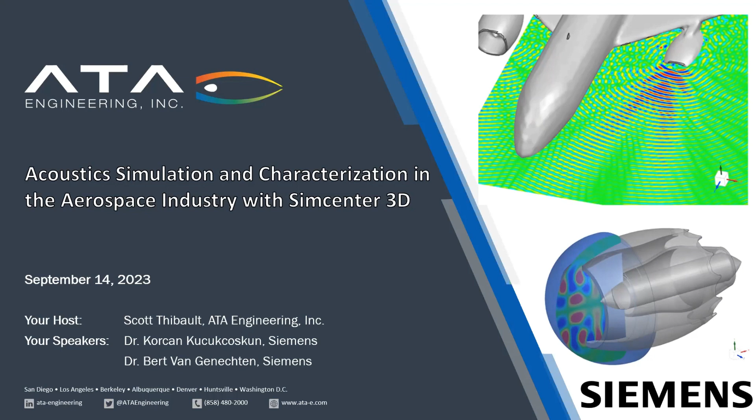ATA Engineering is an employee-owned small business with a full-time staff of almost 200. Our headquarters is located in San Diego, California. We have a very experienced staff of engineers who have worked on a wide variety of projects for government and industry.

Our specialty is providing high-value engineering services to help solve our customers' toughest product design challenges. Our principal industries that we serve are aerospace, space and aerospace - aircraft, launch vehicles, satellites, liquid rocket propulsion, etc.

Also robotics and controls. We have a very interesting practice in themed entertainment - think roller coasters, animatronic figures, that sort of thing. We work in the defense field and are a classified U.S. government defense contractor. We also work in industrial and mining equipment, consumer products, and other fields, wherever our customers need high-value engineering services.

We provide these services from our offices nationwide, starting with our headquarters in San Diego, but with branch offices in Los Angeles, the San Francisco Bay Area, Denver, Albuquerque, Huntsville, Alabama, and Herndon, Virginia. And coming soon, our Northeast Regional Office in Boston, and a new office that we are going to be starting up in Madison, Wisconsin.

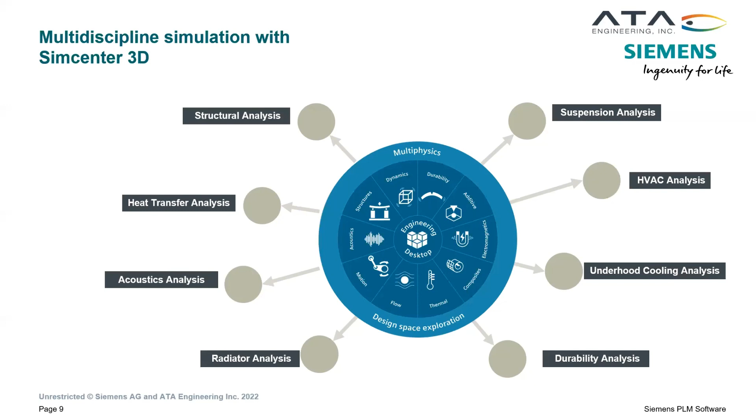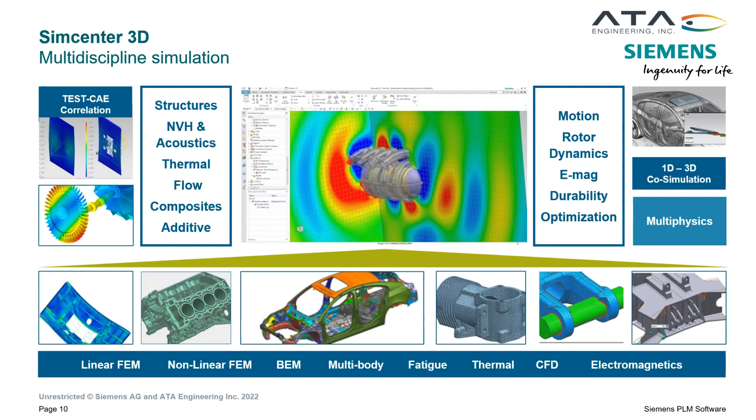Here are all the things that Simcenter 3D can do: structures, noise, vibration, and acoustics, thermal, flow, composites, additive manufacturing, motion and kinematics, rotor dynamics, both high frequency and low frequency electromagnetics, durability, factor of safety, and optimization, all within one product family. Today, of course, we're going to be talking about NVH and acoustics with a focus on acoustics for the space and aerospace industries.

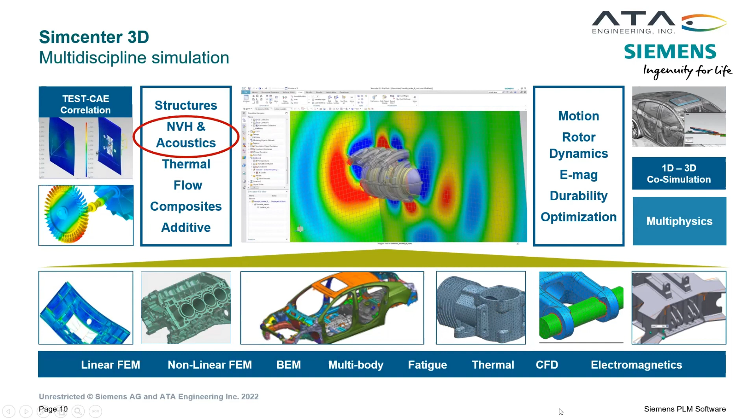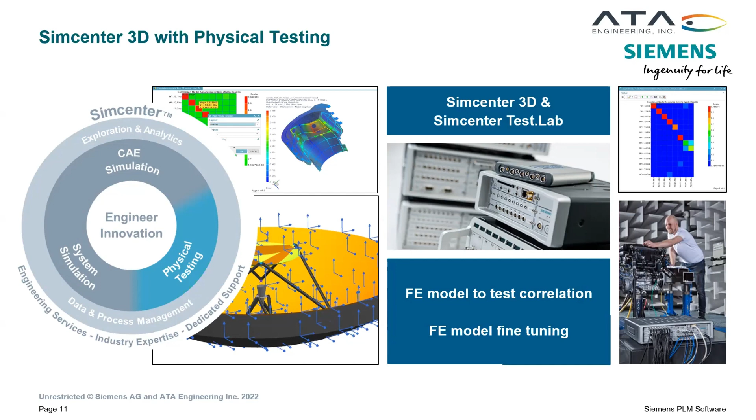Before we move into the presentation itself, I also would like to point out that today's presentation includes references to acoustic testing and test data, as well as to acoustic simulation. ATA Engineering is the exclusive Siemens channel partner for Siemens test and measurement solutions. These include Simcenter Test Lab software and the SCADAS hardware. This is a complete solution for physical testing, not just for acoustics, but for many other areas.

Acoustics is at the top of our list here, but you can also use Test Lab and SCADAS hardware for durability testing, environmental testing, TPA. We have a webinar coming up on transfer path analysis just next week. Also model-based systems testing, rotating machinery testing, structural dynamics testing, and modal analysis for FEA model correlation.

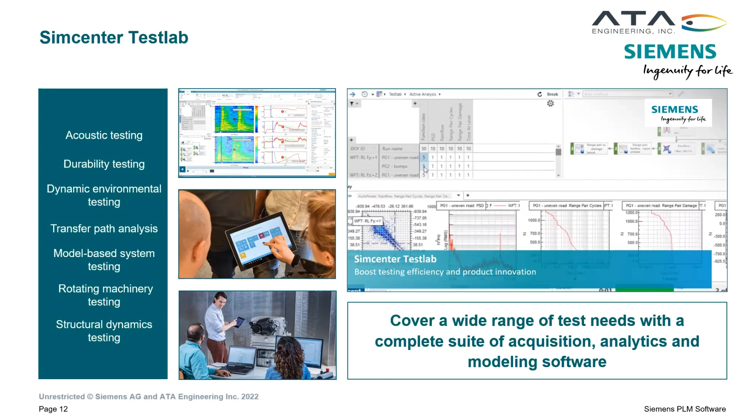On the hardware side, the SCADAS line includes data acquisition systems from handheld units, not much larger than an iPad, to giant laboratory scale units designed to be permanently installed in wind tunnels and other major test facilities. If you have any interest at all in the testing hardware and software, please feel free to let us know.

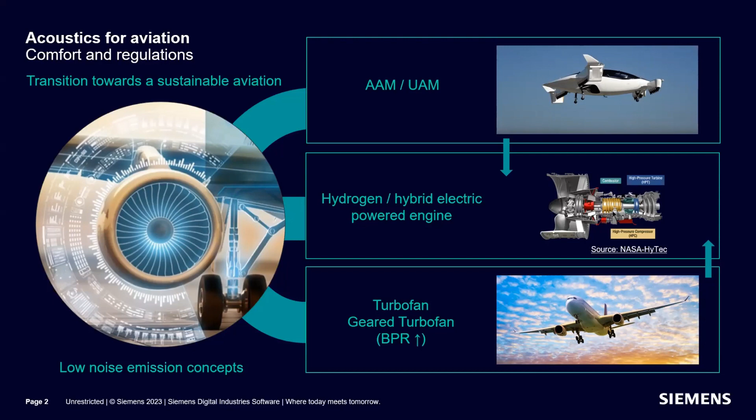That's for acoustics in aviation, as I mentioned, for comfort and regulations. But for space, it's not necessarily driven by comfort and regulation. That's more important for launch survivability, especially for payloads such as antennas, solar panels, and structural panels. They need to survive the existing external loads, which can come from turbulent boundary layers or existing shock waves, and also gas exhaust from the engine during launch. So it's another acoustics problem, but from a different perspective.

At the end, especially for the second half, my colleague Bert will explain more about the acoustics environment.

Today we have a slide set for three case studies. We will start with the lower applications, the drones, representative of urban air mobility problems. Then we'll continue with aero engine intake noise and validation. Finally, we'll go to the launcher for lift-off noise and diffuse field acoustic analysis. All three pillars are based on recent publications. If you are interested, please reach out so we can provide more information and link you to other experts.

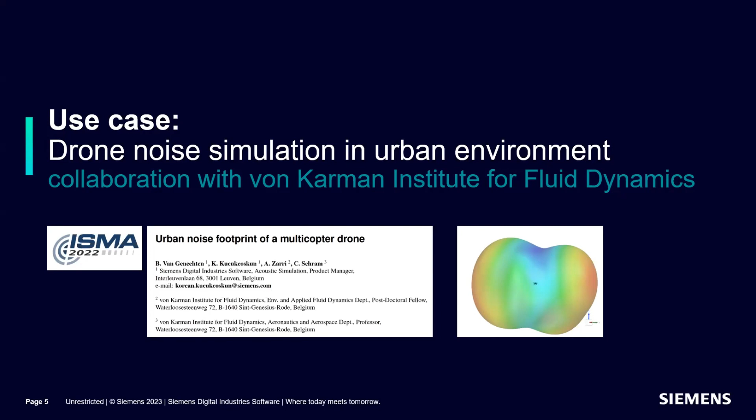Let's start with the drone application. This is a problem we worked on with the von Karman Institute for Fluid Dynamics in Belgium, published at the ISMA conference in Belgium last year. The work is based on the urban noise footprint of a multicopter drone, and we are looking at the acoustic field radiated by a drone towards observers located in urban environments.

What's the motivation for that? We are looking at an aeroacoustics problem for a drone roughly 60 centimeters in diameter, but the exterior reflective surfaces like ground and buildings are a couple of orders of magnitude larger. So if you want to solve the problem for a drone radiating towards an observer in front of a building, you may want to split the problem into smaller chunks and approach it in a way that an end-to-end solution is achievable.

This can even later be used in optimization cycles. So we are going to show how an acoustic field in an anechoic room can be validated with free field assumptions for microphones nearby, but also how the acoustic field around a building will be computed for observers close to the building. The goal is that we don't want to solve the flow problem again, and we want to make sure that when we solve the radiating problem, we are not re-resolving the flow for a building reflection.

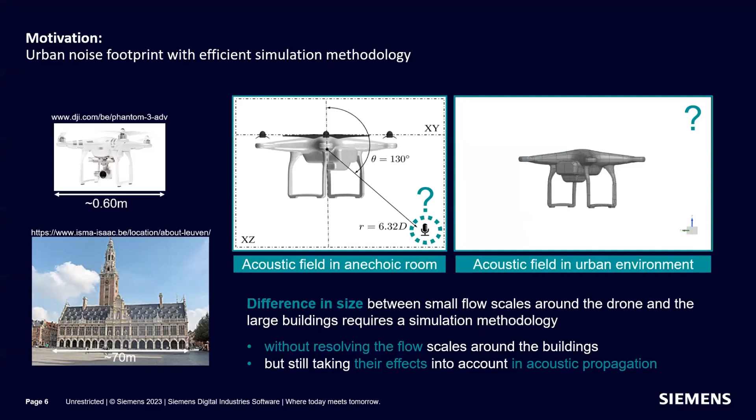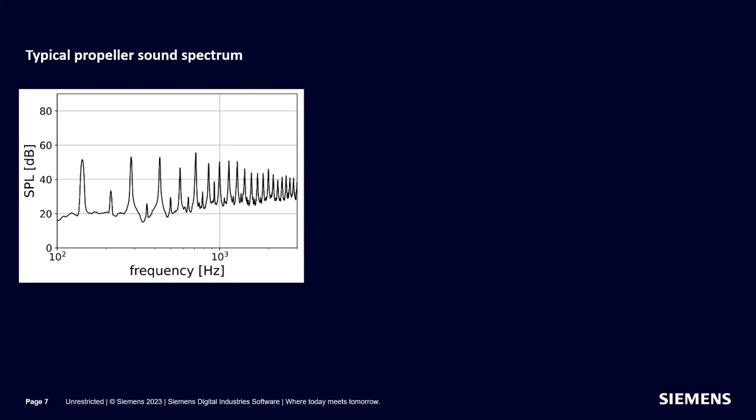For those familiar with the aeroacoustic signature of a drone, you will see tonal and broadband components. This is a representative sound pressure level curve in frequency. You see the peaks, or tones, for the blade passage frequency and higher harmonics. They come based on the relationship between the number of blades and the rotation speed.

Due to the perception of the human ear, this tonal content is the most annoying. So when tackling this problem, if you know the tonal part is important and broadband can be negligible for that particular application, we can look for a solution which solves only the tonal part. Of course, we have other applications where the broadband part is more dominant, and there we can apply another formulation. But for this drone application, and other urban air mobility problems where tonal content is important, we can look for the formulation presented in this paper.

For those familiar with the dominant noise source mechanisms for propellers, you will see steady loading or thickness noise. But we know that from propeller applications, also in the vicinity of an airframe, steady loading might not be the most dominant one, but it may be important for isolated propeller applications in free field.

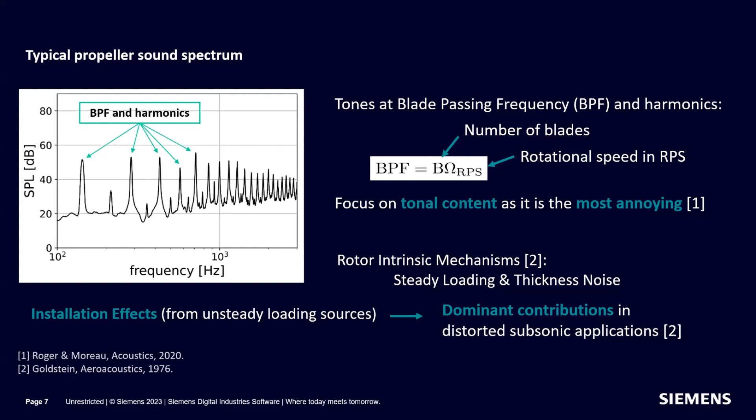Also concerning the shape of the propellers, maybe thickness noise is not important for this application. Therefore, thanks to the installation effect of the airframe on the noise source generation, the unsteady loading sources will be the dominant one. This is also the showcase for this application, so we know the loading noise will be the dominant contribution for subsonic applications.

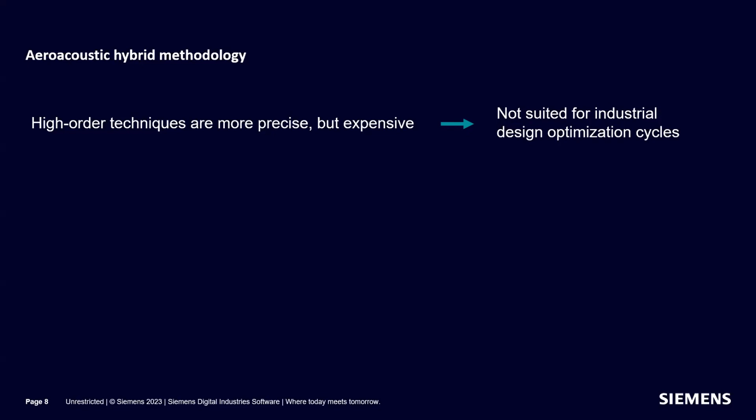You can approach this problem with different simulation techniques. You can do high order techniques too, but they will be more expensive just for the tonal fan noise problem in this urban air mobility application. Therefore, they may not be suitable for industrial design optimization cycles. Of course, they will give accurate results, but at higher cost. So what we are looking for is reducing the cost for the end-to-end problem, a trade-off between accuracy and computational cost.

Since we know which frequencies we are looking for, and we are not interested in the broadband component, we can solve the problem with what we call unsteady RANS simulation. This gives us the unsteady aerodynamic forces on the blade. This will be exported from the flow solution, and then we use a FEM-based acoustic solution to compute the near-field acoustic application and propagate it to get the observer levels.

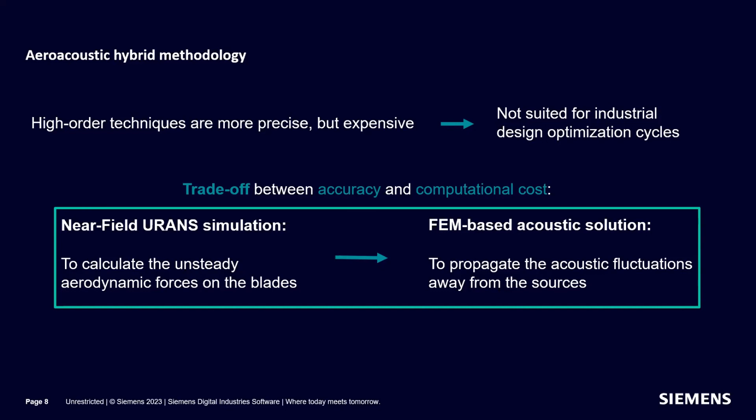So the application is a quadcopter. Two of the propellers rotate clockwise, the other two rotate counterclockwise, and this is a representative of the flow domain.

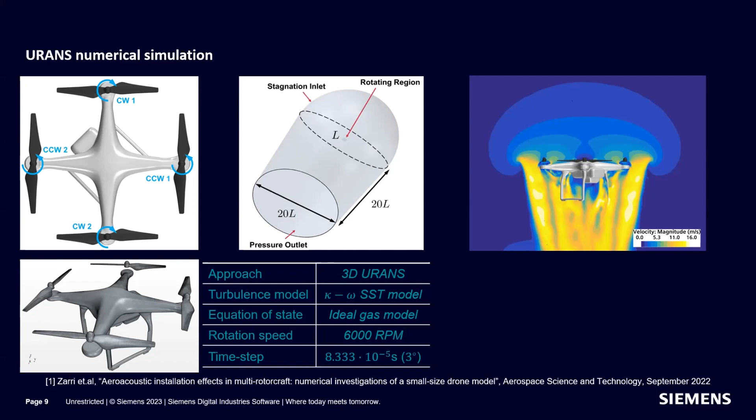I will not go too much into details for the computational cost and modeling, you can find information in the paper for the application. But what I can tell you is this is a k-omega SST model, 3D solution, not 2D or cyclic symmetry. We are looking at an ideal gas model with a 6,000 RPM propeller. All propellers rotate at the same RPM in different directions. The time step chosen was 8.3 times 10 to the power of -5 seconds, corresponding to 3 degrees of rotation.

Once the simulation is performed in Simcenter STAR-CCM+, the authors validated this with 1.4% accuracy against experimental thrust. This is very important for any aeroacoustics problem because we need to first make sure that aerodynamics is well captured such that we can use those aerodynamic fields to create a noise source. You can find more information in a recent paper in the Journal of Aerospace Science and Technology published last year covering this exercise.

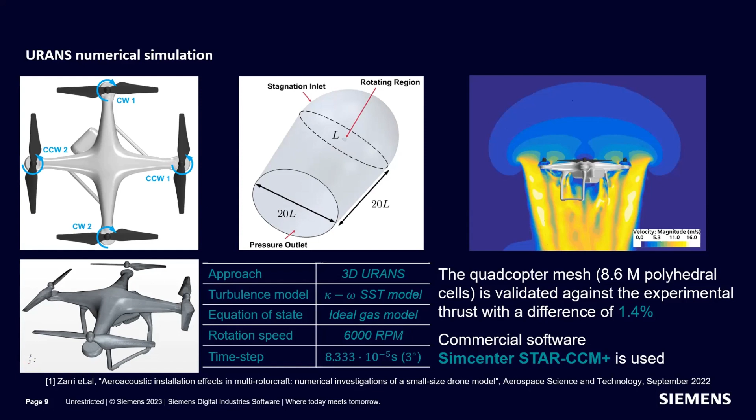Our users at von Karman Institute also did an exercise to see how much the airframe affects the aerodynamic source generation, and also how much the airframe affects propagation. So you will see some interesting outcomes also in this publication.

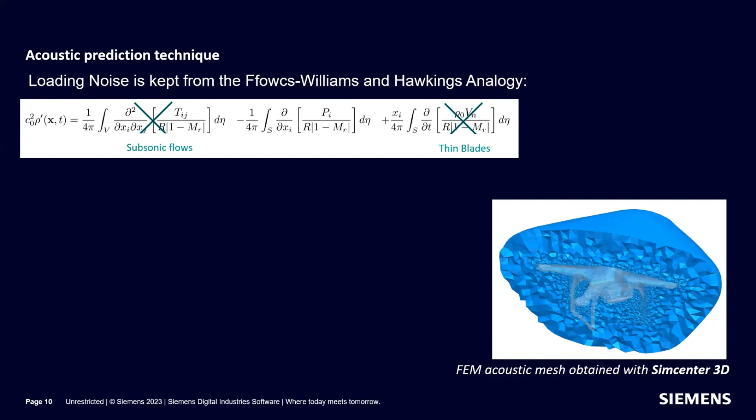I will not show too many formulas here in the presentation, but in a nutshell, we are using a typical Ffowcs Williams-Hawkings analogy. Since we know this is a subsonic and thin blade application, some of the terms can be neglected - we are not saying they are not there, just that they could be negligible. So we can drop this to a simple loading noise application, and by exporting only the surface pressure on the blades, we can create an equivalent noise source in Simcenter 3D.

This can also use the airframe as a scattering surface, which will give you directivity changes in the immediate neighborhood of the quadcopter.

You can see a sketch of a cut plane of the mesh used in Simcenter 3D. It's a convex mesh, and the convex boundary has two properties: it doesn't let acoustic waves generated by the source back into the finite element domain, but it also lets acoustic waves propagate freely to the far field observer. So you don't need to mesh all the acoustic field all the way towards an observer—observers can be outside of the FEM domain.

What I'd like to highlight is that for those familiar with FEM, this may not be the best mesh because there's not a uniform mesh distribution—some parts are fine, some are coarse. This is because we are using a finite element adaptive order methodology, based on refinement of the acoustic mesh and high order shape functions.

Just to give an example for those familiar with the finite element concept: you need to mesh your problem with, let's say, a rule of thumb of 6 elements per wavelength. So if you're solving a multi-frequency problem, like multi-blade passage frequency, you need to create a finite element mesh accurate for your highest frequency. Then you solve different frequencies using the same mesh, and suddenly you're using a very fine mesh for a very low frequency. Here's a basic sketch representative of a coarse mesh—you see it gradually gets bigger and bigger.

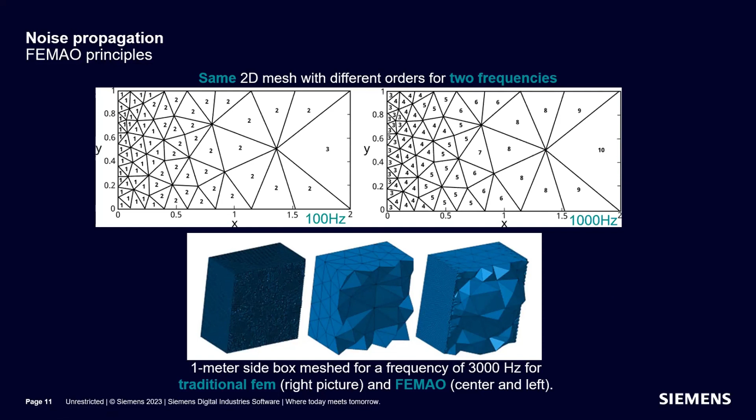We use finite element adaptive order for the near field, and the validation can be found in the paper—for the first 4 blade passage frequencies, we got very good agreement between measurements performed in an anechoic room and the finite element model used in Simcenter 3D. The delta dB is around 3.5 dB, which is acceptable for the first 4 BPF. This validates free field anechoic room performance.

But let's go to the next step: putting the drone in a hovering position in front of a building.

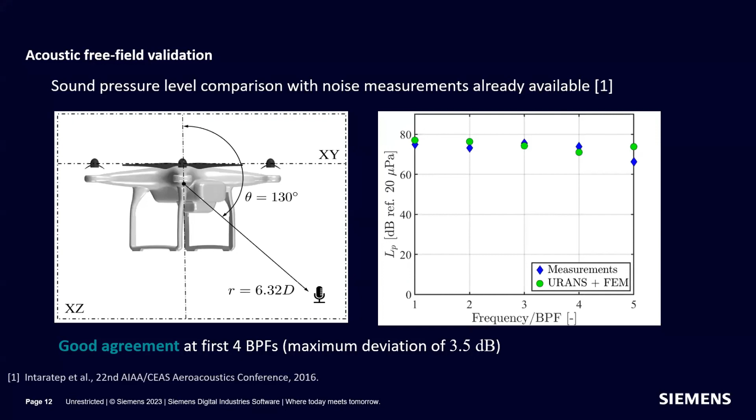For this, we're adding a new solver on top of the existing finite element framework. This time we use ray application to tackle acoustic propagation using Simcenter ray acoustics. It's based on the ICARE solver from CSTB, which simplifies the problem for high Helmholtz number cases. It includes adaptive beam tracing for smooth surface description together with high order diffraction.

You can see in the animation what happens with a noise source shown here, a reflective surface, and also a wall. When the acoustic pulse comes towards the observer, if you don't have a smooth surface, it gets cut into smaller chunks—this is not reality. In reality, you have smooth surfaces, and that's taken care of in the solver.

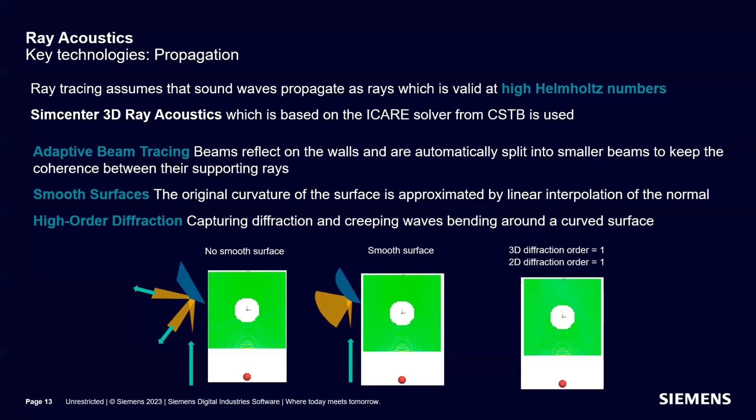And finally, you can add diffraction to make sure acoustic waves actually follow the correct pattern. I'll let the animation run once more so you can see the differences when adding more physics to the propagation. Here we also used 2D and 3D diffraction for the next section of the presentation to show how accurately it can be captured.

Here we are looking at representing a finite element problem in a way that we can transfer the information to ray application—therefore, we benefit from source directivity here.

We create first the acoustic field around the sphere in free field of the drone using finite element application. And then this goes to a ray model as a point source with directionality. So this sphere eventually shrinks back to the drone position as a point source, but getting full 360-degree directivity. And that's done in Simcenter also using a directionality application.

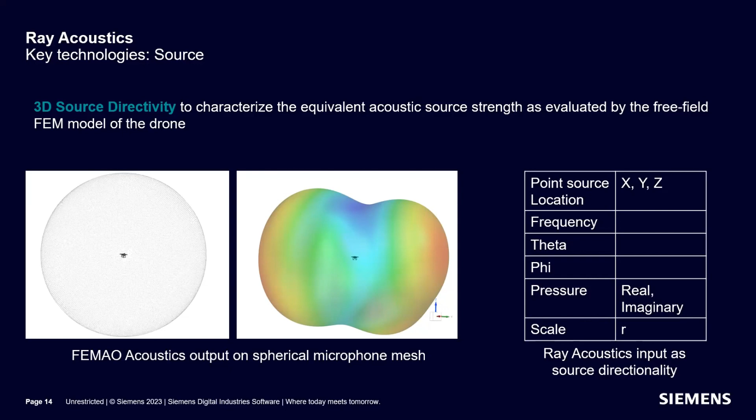Once you do that, you can position this drone anywhere in the space and get the reflection from external boundaries. For example, this is the library building in Leuven, and we put 3 hovering points to show the real part of the pressure. You see the reflection, and also the interference fringes and effect of the gallery. Of course, these are just colorful images, so we can look for some validations.

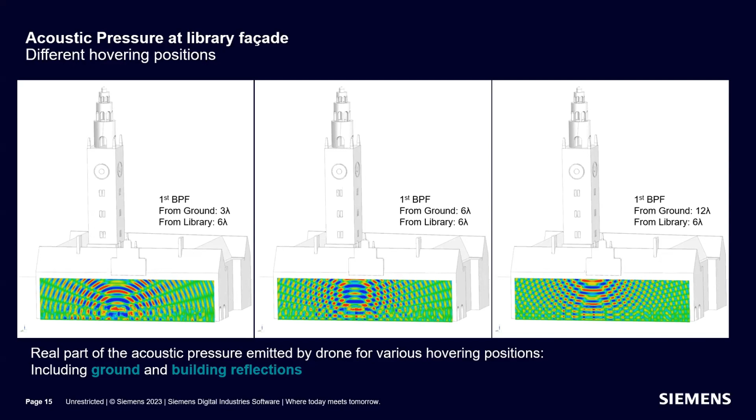We don't have experimental validation for that, but we can actually mimic large domain reflection with analytical models. For example, this is the free field representation of a drone located at point S, and here we are not taking into account any reflection, no ground, no building, nothing. But what if we just add a rigid ground and ignore the building? With ray acoustics, we can add the ground and solve the ray problem, and then you see the interference fringes - this is the amplitude of the pressure, and you can see the pattern.

But also, since this is an infinitely large ground, you can actually put a mirror source to represent the analytical solution. So here, instead of one source, there's another mirror source, and this gives actually the same results as the ray problem. On top of that, we can add the full building as a reflective surface and assume in the analytical model the full building is infinitely large.

So then we can actually mimic the mirror problem. Instead of one drone, we can put 4 mirror drones, and the total contribution will give us the total response. And in ray, we can do the same, and we will get an accurate representation of the propagation.

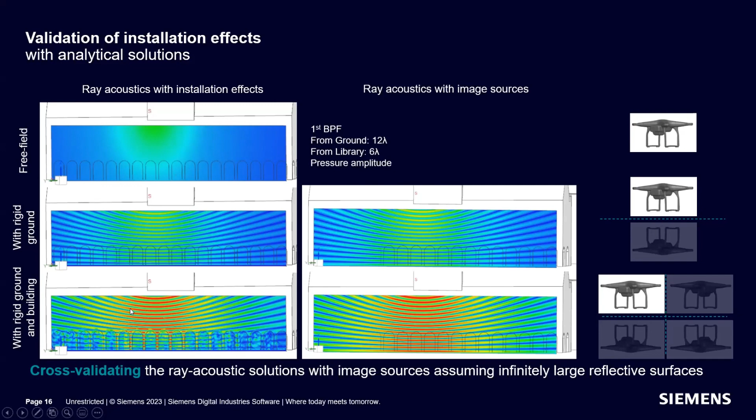You see that especially close to the flat surfaces, the results are similar, but ray is more accurate close to the gallery entries because it is based on realistic geometry and not just image source. So this validates, qualitatively, that these two applications can give accurate results, and ray can take into account more geometrical details of the propagation.

One last thing to show is the diffraction effect. For example, if you have an observer located on the side of the building, and for a drone operating in front of, or hovering in front of, the library, you can see the acoustic field is split into 3 dominant regions. The first one is the total field, which includes the incident field plus the reflection from the wall.

The second field is the triangle area, which only includes the free field response and without any diffraction, because here we ignore the diffraction. And the third is the perfect shadow zone - the incident field doesn't reach it because the direct ray is cut by the building. You don't see a perfect zero here though.

You have some acoustic field because there are openings under the gallery, so some acoustic rays go under the gallery, reflect back and create some levels. But to represent this more accurately, you can define that this edge of the library is diffracted, and then you see the continuous distribution of the three acoustic domains - again the total field, incident field with diffraction, and the shadow zone with diffraction. But of course, now they're all total field eventually.

And you can also plot the ray paths to see how the acoustic waves reach an observer. That could be interesting if you have multiple diffractions, and you can follow where the observer is located and see how acoustic waves reach. You can also do echograms that are not shown in this publication.

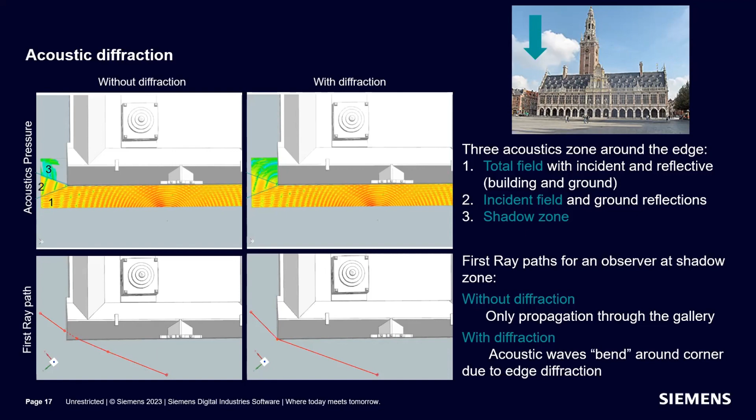Okay, so that is for the drone application. I'll continue now with the Aero Engine intake part. This is based on a publication of my colleagues, Sylvain and René. They published their work earlier this year at the ASME Turbo Expo in June.

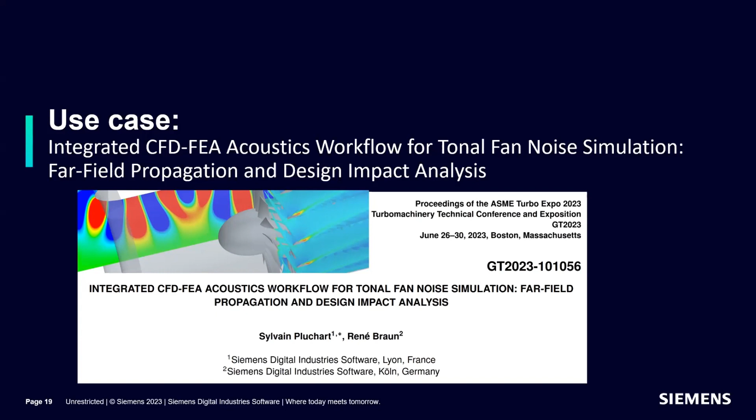The work is about an integrated CFD and finite element acoustics workflow, focusing on tonal fan noise, with validation against experimental data available in the literature. So if you're interested, I can link you to my colleagues, and I can also provide more information about this recent publication.

We are now looking again at the sharp tones, and we approach this problem with a similar hybrid solution, solving first the flow and coupling with acoustics.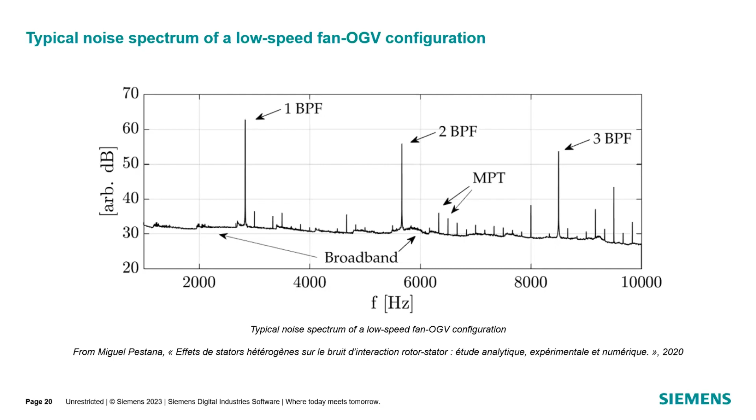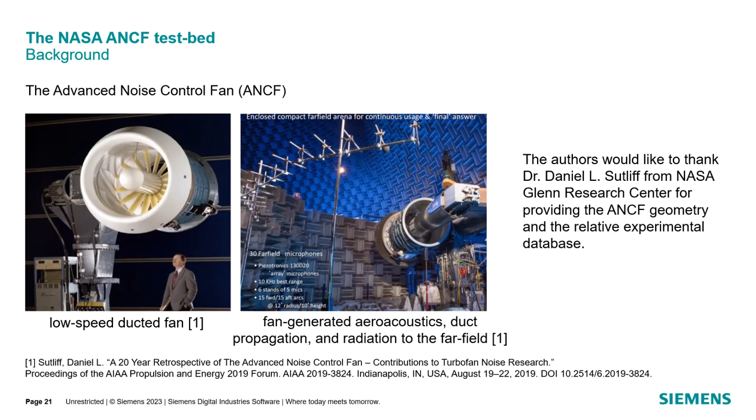My colleagues use the data available in literature based on the NASA Advanced Noise Control Fan, ANCF. It is based on a low-speed ducted fan, and measurements are available for the far-field microphones. My colleagues and I also thank Dr. Daniel Sutliff from NASA Glenn Research Center for providing the geometry for ANCF and the relative experimental database. Using this model, we create a representative sketch for the ANCF test bed in Simcenter.

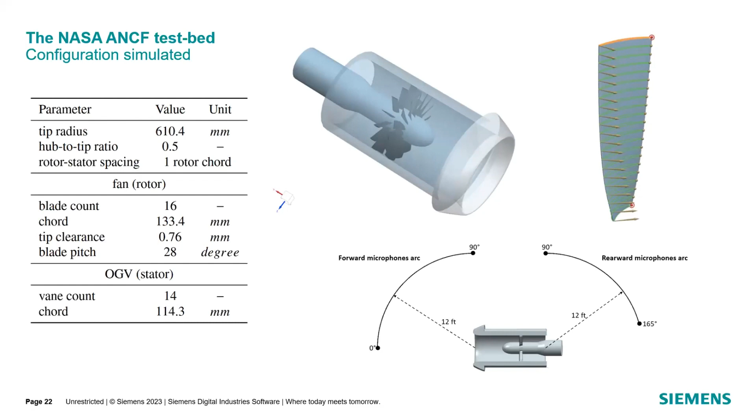You can find more details on the test model in the paper, so I won't go into too much detail. It's a representative application with a scaled RPM, but overall you have 16 blades and 14 vane count. We are looking at measurements available on two microphone arcs, one located forward and one backward of the fan - upstream and downstream. We will compare the simulation results with measurements on these arcs in this study.

I mentioned the previous drone study used U-RANS, since it was an open rotor and we were looking at the tonal case. But here it's a ducted propeller - not an isolated component, but a rotor-stator interaction application. This also made our colleagues change direction a bit and look for a different flow simulation calculation. This time they are not using U-RANS, but RANS coupled with the harmonic balance method.

Harmonic balance solves a slice of the problem, a sector of the rotor-stator model, which I will show in the next slide, and that creates an equivalent noise source. Then using that, they use FEMAO technology again, as I mentioned, which gives us the acoustic field radiated outside of the aero engine intake and exhaust.

What is interesting here is that they are both based on the same CAD model. This aligns with what Scott mentioned at the beginning, that the source of truth is the same CAD. So you can create the CFD mesh also based on the same CAD, and the acoustic mesh can also be created on the same CAD data.

What I want to mention is that the data transfer from harmonic balance to FEMAO is based again on CGNS files, similar to what we did for the drone. But this time it's scripted - my colleagues work on the harmonic balance output file and convert it to a time signal that can mimic the equivalent CGNS input for the FEMAO problem. This also shows the openness of the software for user-defined input, to create user-defined noise sources, or at least pressure distributions, outside of Simcenter 3D.

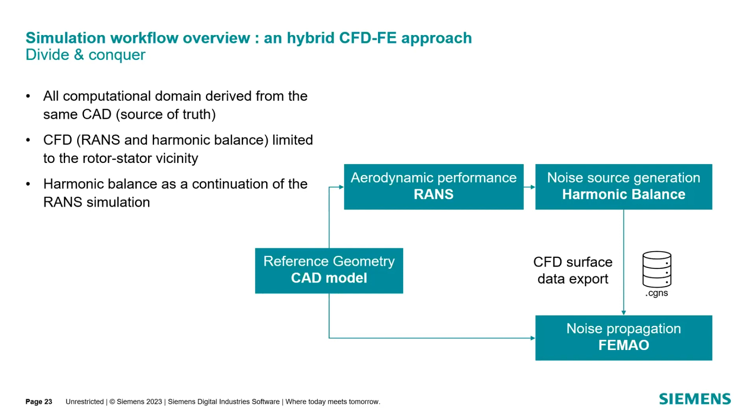And using the CGNS data, we create again noise sources. You will find more information in the paper too, and please feel free to reach out - I can share more information on this if you're interested in the harmonic balance solution.

So we are looking at a rotor-stator sector using Simcenter STAR-CCM+, again an ideal gas application with Spalart-Allmaras with Shur curvature correction, and that will be used as an input as a noise source. So this is for the flow part - we are not necessarily solving the acoustics here in this application with harmonic balance, we just extract what we want as a noise source for the downstream acoustics simulation.

So this could also be considered as a two-persona workflow, where one team can work on the flow and give the loads to an acoustics team, and the acoustics team takes care of the acoustic propagation with the input from the other team.

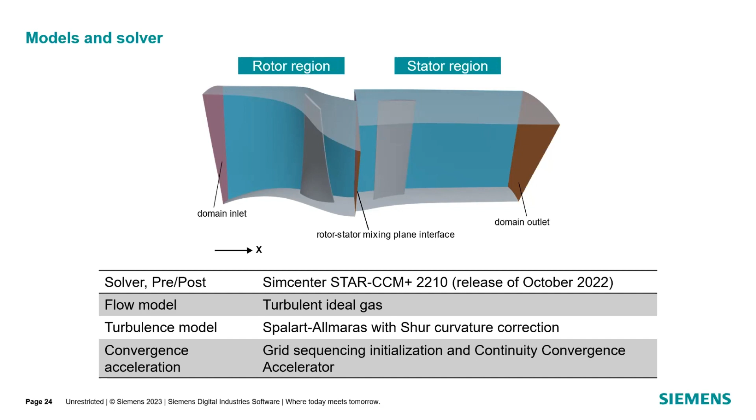This is a simple representation of the Simcenter 3D model. You see a convex mesh around the aero engine model for the ANCF model. We have the microphone arcs, both upstream and downstream, and finally a cut plane of the 2D microphone mesh.

Of course, for validation we don't need the 2D microphone mesh, but we want to show how the acoustic waves propagate on both sides, not necessarily sticking only to the directivity curves. If you look at a close cut plane of the full domain 3D mesh, you can see we are using very coarse elements on the curvature, also for what we call the automatically matched layer surface, which can radiate the acoustic field outside.

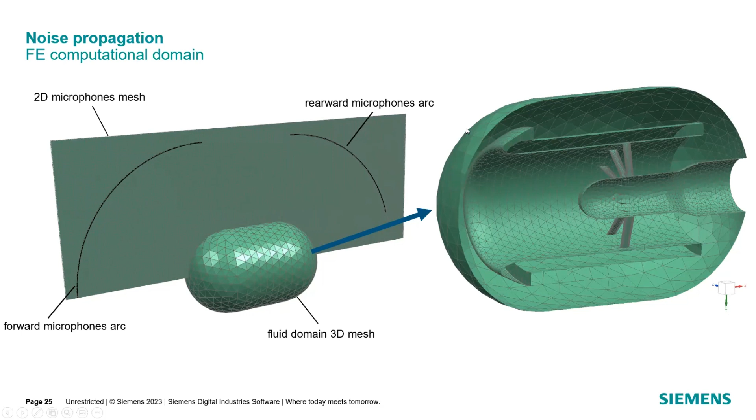For a high frequency problem, regular FEM models can consider this too coarse, but FEMAO can take care of these large models with high order elements, using sources again both on the rotating component and this time also on the stationary component.

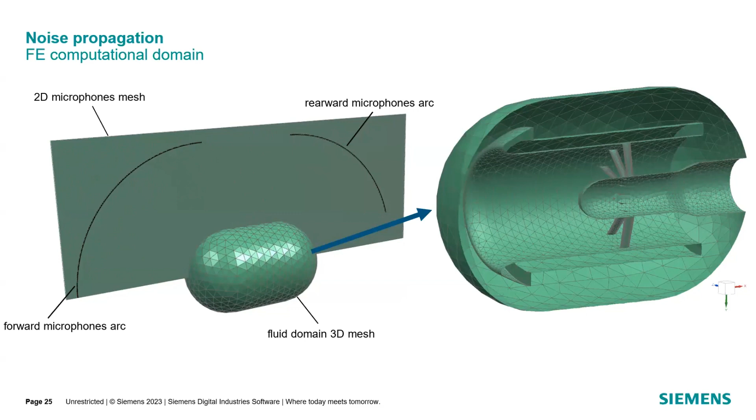Here the noise source is not combustion but the aeroacoustic component, and this radiates towards the far field observers.

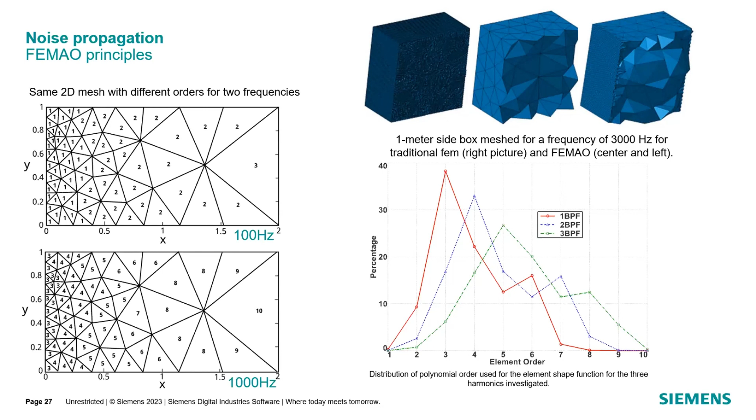This may not give too much information by itself, but what I can highlight is that using the same mesh, high frequencies take longer to start solving, but once solved, lower frequencies solve much faster than higher ones. So the time spent per frequency decreases as the frequency marching increases. High frequencies are more expensive to solve, but with the same mesh, low frequencies solve faster. With standard FEM, every frequency would probably take the same time and be computationally more expensive.

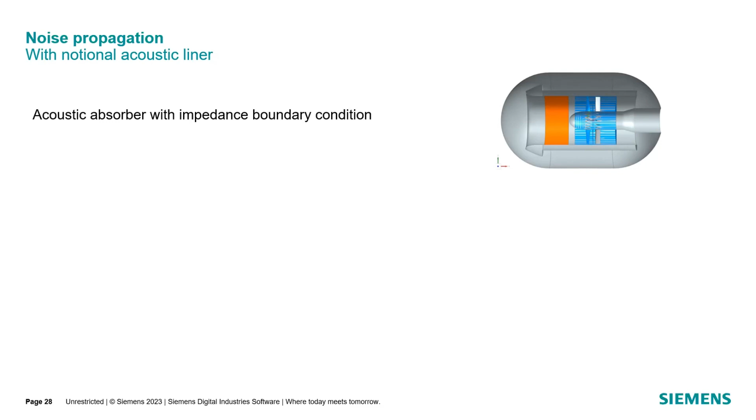Finally, that was for the rigid wall aero engine, but aero engine applications also let us define liner surfaces before the acoustic field leaves the duct. You can see this for the liner application, where you can apply a rigid wall or liner treatment for acoustic absorption.

We also take into account the Myers correction and can include the flow effect. With liner treatment, the directivity and sound pressure level will be lower because some acoustic energy is absorbed. Especially for those designing liners, a 3D model can be helpful on top of axisymmetric studies. This gives us insight into how acoustic treatment can be applied for the aero engine intake problem.

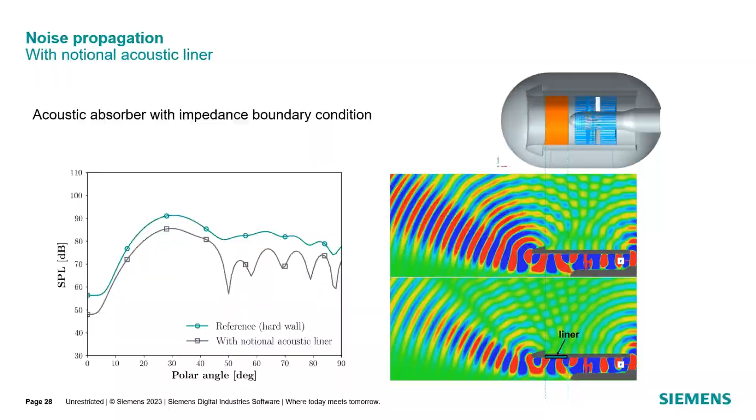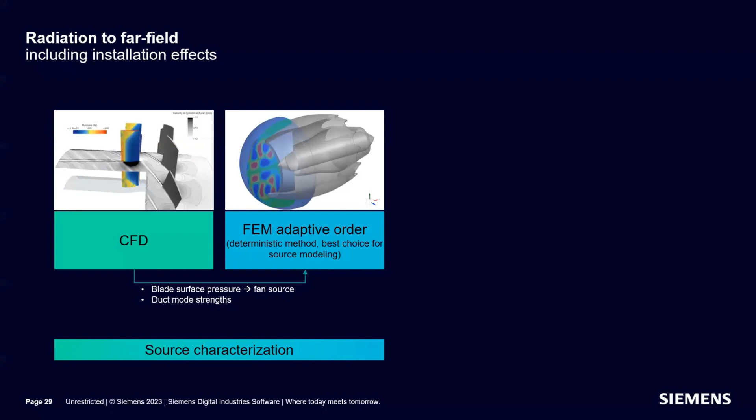Once we know the source modeling—and this part isn't in the paper—you can also link it to other propagation tools. We showed harmonic balance coupled with FEM adaptive order; it could be based on a fan source, or you could script it to get the duct modes. You can also link this solution to another problem where you get the acoustic field outside of an aircraft, together with reflection from the aircraft engine, to see how the acoustic waves generated by the intake are reflected and scattered by the aircraft body itself.

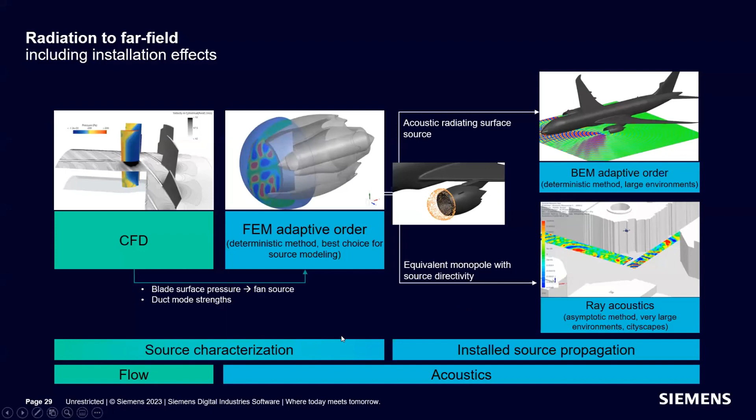This can also give you an idea that could be interesting for ramp noise applications. In case this engine initially starts, you see how it radiates. Of course, for ramp noise, you also have APU and other noise sources, but that can be tackled with a similar application. And as described in the drone application, you can put the ray model and solve the acoustic problem. It's not only source characterization, but also for the install and propagation within urban environment.

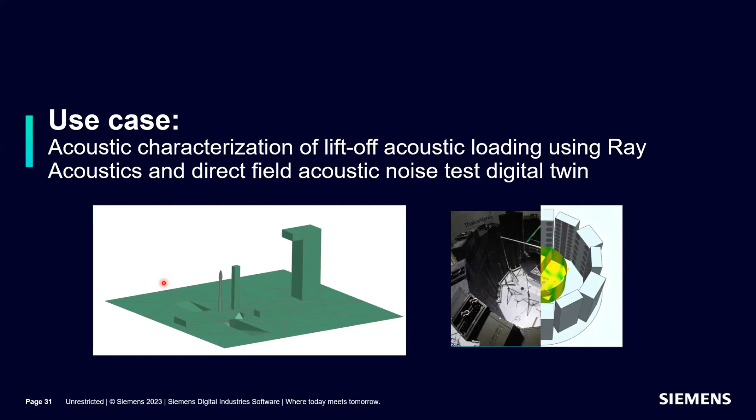Going back to what Korcan mentioned, going from aerospace, where it's more about comfort and regulation, to space launch, it's more about structural integrity and launch survivability. There are extreme acoustic loads generated during liftoff, and we ideally want to characterize those and confirm that these launch levels and characteristics will not damage the very sensitive and expensive equipment which is typically being launched.

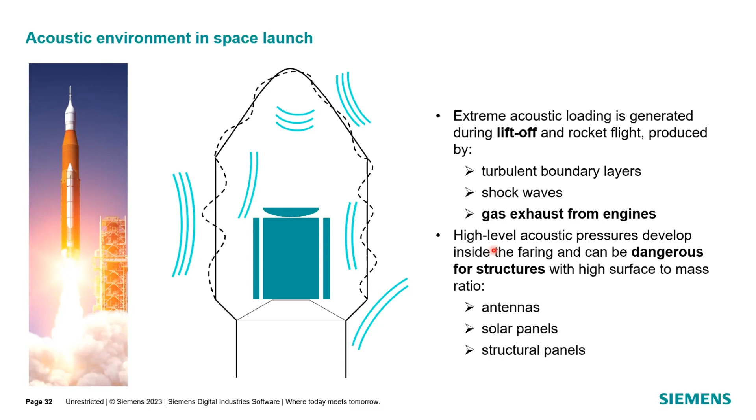For that, there are a lot of simulation challenges. The first one we want to highlight is the need to characterize the pressure fields at the exterior of the fairing and then also the propagation to the interior. We know that the levels are high, but are the levels uniform? Are they diffuse? Typically, they are assumed to be diffuse and uniform.

Basically, traditionally, acoustic tests on spacecraft are performed in large reverberant rooms. But we also know from some tests that, due to the asymmetry of the surrounding of the launch vehicle, for example, the support structure and potentially other buildings in the vicinity may divert some of the acoustic energy from the exhaust plume towards the rocket. There might be an asymmetry in there, and that's why a lot of research effort is put into developing new testing methods.

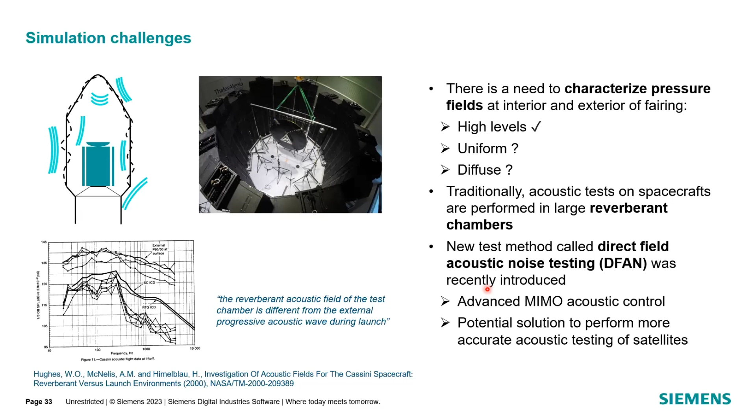One of those, which is getting more and more acceptance in the qualification area, is direct field acoustic noise testing, where we place large stacks of loudspeakers such as shown in this picture, and I'll come back to this use case later on. They are placed around the test specimen, and then advanced multi-input, multi-output acoustic controls, as the ones available in the Simcenter Test Lab environmental testing suite, are used to generate either equivalent reverberant loads, or could potentially even be used to generate these asymmetric, more realistic loads.

Let's first start with this first challenge, the launch environment simulation. For those who want more technical details than what I'll present here, at this moment, this week, some of our colleagues are presenting the work I will discuss now during the Forum Acusticum conference, currently being held in Turin, Italy. It's focusing on acoustic characterization of the Vega liftoff environment, and for this we are using ray acoustics modeling, which we then link to direct field acoustic noise testing.

As I said, one of the primary launch environment loads are the loads from the exhaust plume. So what we need is, one, a simulation model that can predict the environmental propagation of acoustic noise due to the exhaust plume, and we need a source model. For this source model, we're using a well-accepted analytical equivalent model developed by NASA, the distributed source method, where we can excite the model acoustically by representing the plume noise sources as a discrete set of individual point sources with semi-empirically determined fractional engine power contribution for each source, depending on how far along this deflected plume source path the source is positioned.

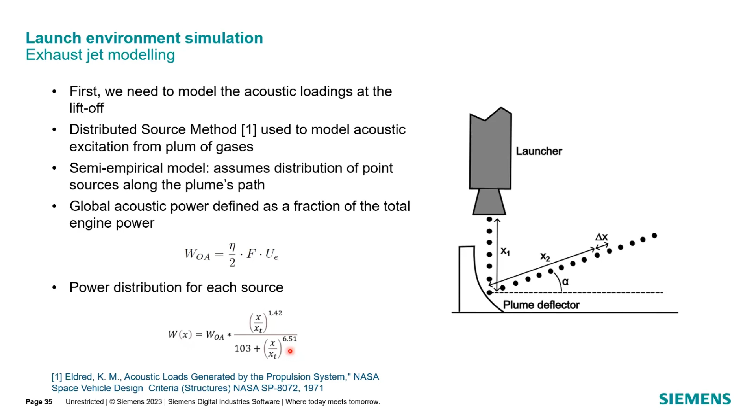So basically, we can use these types of source distributions and introduce them in an environmental model, where you can see the Vega launchpad geometry represented in our Simcenter 3D environment. We have the launcher, the launch tower, large buildings in the vicinity, and the launch plume deflectors, whose geometry is modeled in detail below.

We then introduce this distributed source method model, where each of the individual red dots represents a source contributing to the acoustic loading, which we apply to this model with the aim of predicting the blocked pressure loading on the launcher, and especially the fairing at the top.

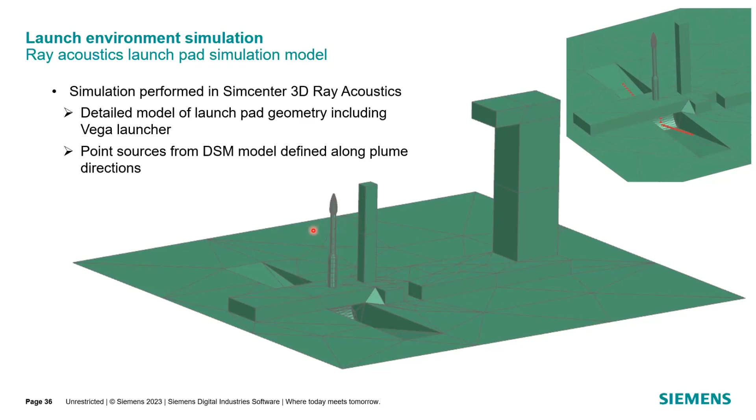As Kortjan already mentioned, our ray acoustics solution is a very attractive approach for this because it's specifically tailored for high frequency applications in very large environments, which leads to large Helmholtz numbers, meaning we can use ray tracing models. Additionally, as Kortjan showed, we have very advanced physics included.

For example, higher order diffraction models, which you can see here. What happens is that the noise contribution from one of those sources bounces off the deflector, but in reality it bends around these sharp corners of the supporting pad on which the rocket is positioned. If we didn't have these high order diffraction models, we wouldn't be able to capture this diffraction, and we would misrepresent the distribution of the acoustic energy. But as you can see from this acoustic path, we take it into account — it bounces off the launcher, off the launch tower, and then again towards the fairing.

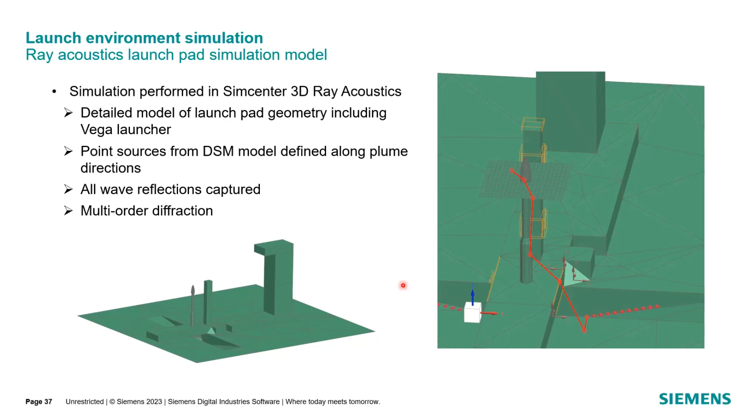With these models, we can quite efficiently capture all wave reflections, and we can then predict the noise levels both near the ground surface, near the deflector area, and also at the fairing.

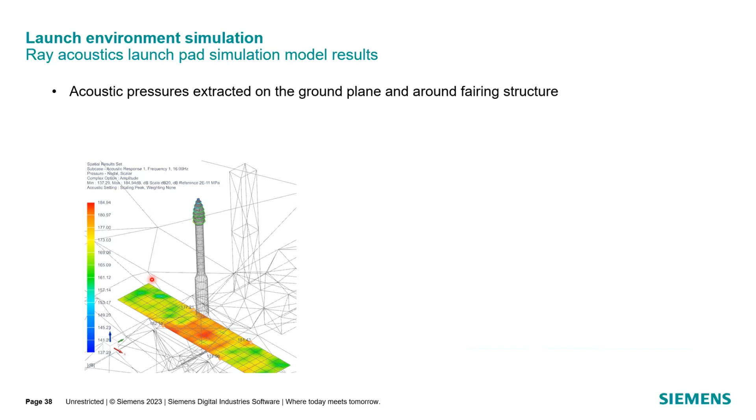For experimental validation, it's quite hard to get reliable data because it's a very difficult environment to measure in. What we did find is we can do a qualitative estimation — from a publication specifically on the Vega launchpad from 2016, there's a statement that the overall acoustic levels from the plume of the advanced solid rocket are estimated to be higher than 180 dB. This is also the range of levels that we find from our simulations.

So once we have this distribution, you can see here at different rings around the fairing a clearly asymmetric loading due to the reflections of the buildings in the vicinity.

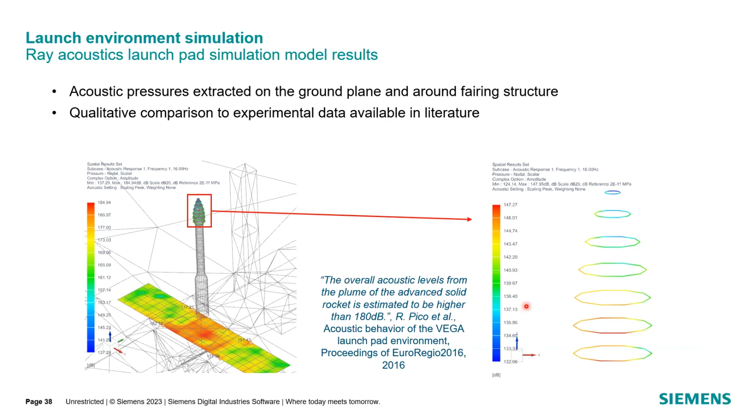Then, of course, the question is, can we now reproduce this, and which type of testing environment can actually do this? This is where direct field acoustic noise testing comes into play.

As I mentioned before, it's a rather recent testing strategy which offers an alternative to reverberant room testing, where we position a large number of typically commercially available loudspeakers, for example the ones you'd use at a rock concert. We drive them with a multi-input, multi-output control system in such a way that we try to reproduce the desired acoustic environment around the test specimen.

Most of the research has been focusing on generating diffuse acoustic fields equivalent to the reverberant room fields, in order to be able to have a one-on-one comparison between those two testing methods. And that's also what I will be discussing now.

If you're interested in both our testing methods and using digital twins — digital counterparts or representations of such test setups used for pre-testing and de-risking of tests — I can refer you to a journal publication that came out earlier this year, discussing the technical background in detail. We also have a publication on a parametric analysis, presented in May this year at the 33rd Aerospace Testing Seminar.

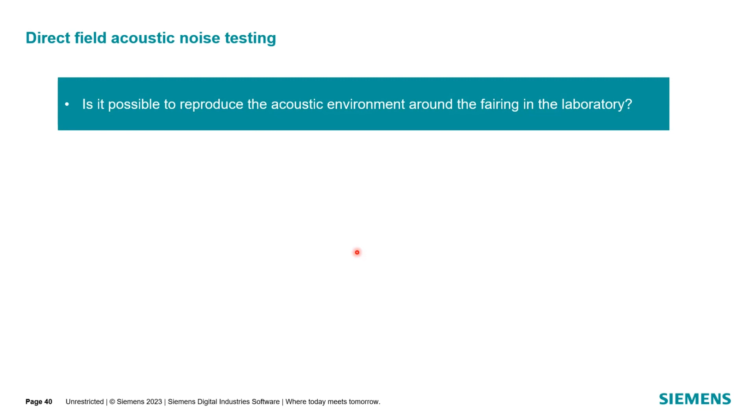So a little background on direct field acoustic noise testing: this is actually a simulation activity which supports, enriches, and facilitates testing with environmental testing systems like the ones available in the Simcenter test lab environmental testing. So basically the question is: is it possible to reproduce acoustic environments around the fairing in the laboratory?

The classical answer is to use a reverberant room test. It's a standard practice since decades. Basically, very large rooms are excited by huge horns, which allow reaching a diffuse field condition around a test specimen with very high sound pressure levels, similar to what the test specimen will see during launch.

The alternative approach, which I will focus on now, is direct field acoustic noise testing. It's a cheaper and more flexible approach because you bring the testing facility to your specimen. You build a tower or cylinder of loudspeakers around your test specimen, for example here, a reflector dish. Then you use a multi-input, multi-output closed loop control strategy to shape the acoustic fields around the specimen such that they match the field you want.

It's a very active field of research. There's continuous improvement of technology, and this activity using simulation models to support this is one of those activities.

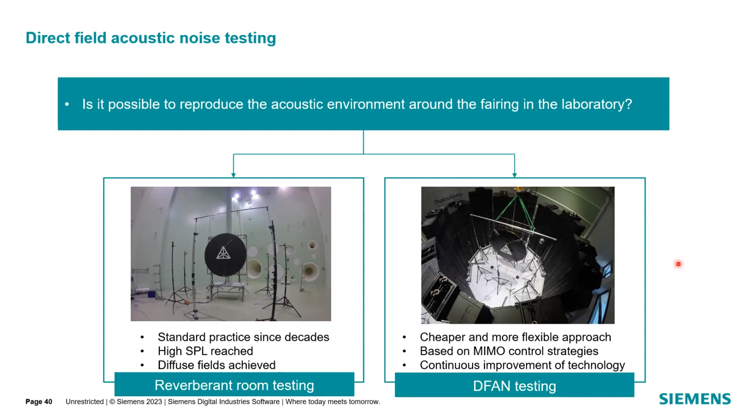So basically, the way the MIMO control works is the speaker stacks are linked to a control system, which drives individual speaker types or individual speaker stackings individually. Typically, we apply a narrow band multi-input, multi-output control, which designs random signals to drive each of the individual speakers or speaker stacks. It's a closed loop system.

There are some microphones positioned in the inside volume, which are then used to iteratively or online change those random signals such that we reach the correct levels and correct acoustic fields. It's based on conversion of the specifications we typically get in SPLs from the launch authorities' specification documents, and it's converted to PSD. Then the system generates a spectral density matrix for the targets, both in amplitude, phase, and coherence.

What is recommended here is a pre-test analysis—doing a virtual test upfront, such that you know how the system will react, how it will interact with the specimen, such that you can foresee potential issues, and correctly design your test setup: which speakers to use, where to position them, and how to connect them to the different control outputs. On top of that, you can also automatically select the best location for the control microphones.

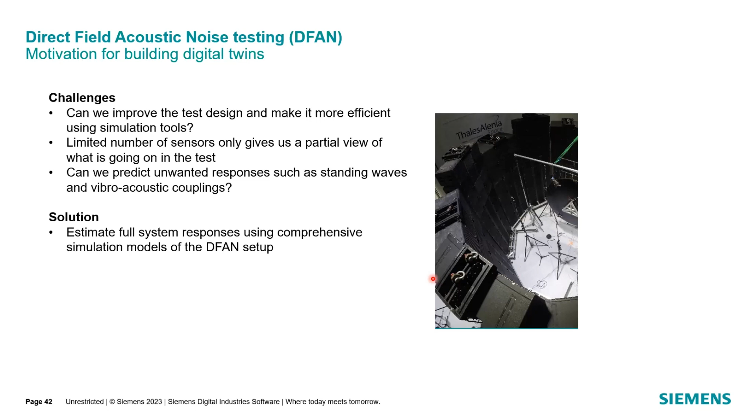In that way, you can have a high fidelity model which complements your testing and allows you upfront to assess how the system will behave, how it will interact with the specimen, and how to optimally choose all your parameters and all your sensing locations.

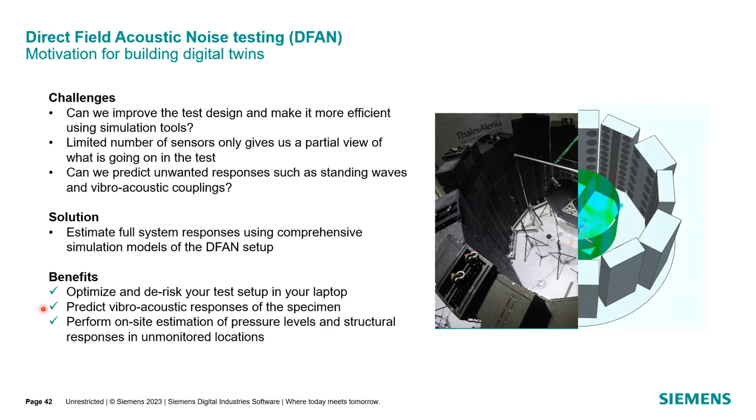So it allows you to optimize and de-risk your test setup basically on your laptop. It allows you to predict vibroacoustic response of the specimens and on-site estimation of pressure levels and structural response in unmonitored locations. So the system looks broadly like this.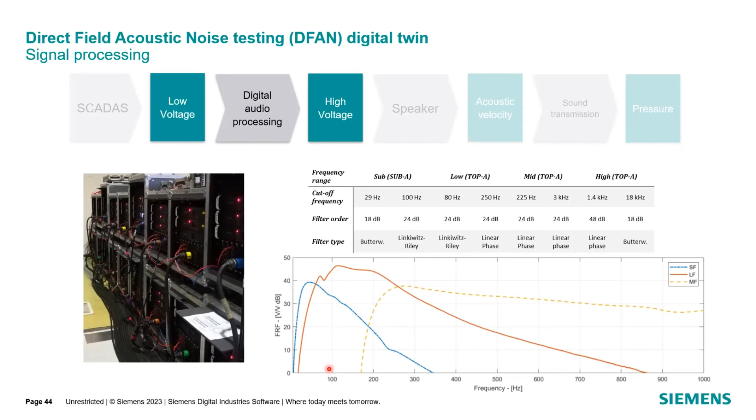For the mid-frequency speaker, you see it in yellow. So you can have this for different types of drivers, and you can actually characterize this experimentally.

Then the voltage enters the speaker. How to deal with this? Well, for that, you can develop dedicated loudspeaker models based on electromechanical equivalents, and introduce these as source models in an acoustic radiation model. So you can model the speaker box like it is here—this is a vented speaker box where you have 2 diaphragms. You can introduce these equivalent loudspeaker models, modeled very similar to what we did with the drone before.

You can model the acoustic environment and the radiation around it, and then basically predict what will be the loudspeaker membrane vibration. Here you see a comparison between, in blue, a test and, in red, the model, which shows very nice agreement. Of course, this then needs to radiate towards the acoustic environment.

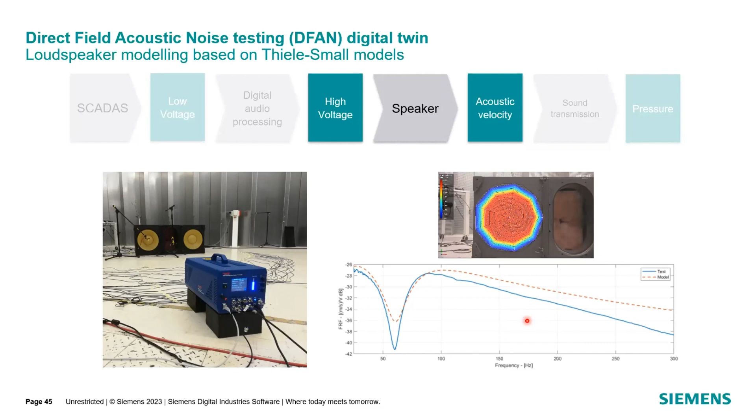So with that exact same model, we can actually calculate what is the sound pressure being radiated. Here you can see a comparison between measured sound pressure level over control voltage or input voltage. In blue we have the test, and in red the simulation, which also shows very nice agreement.

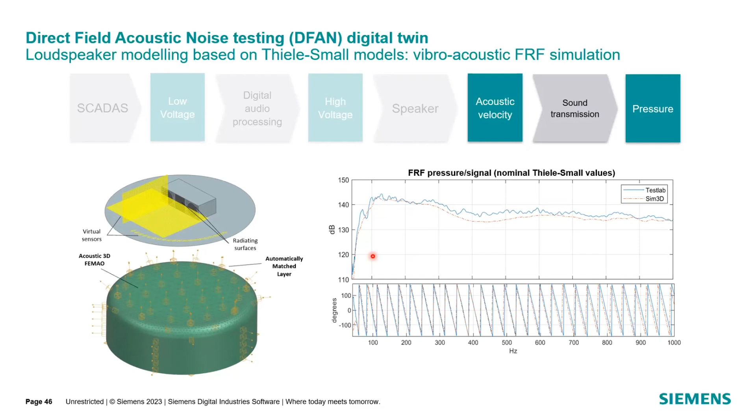So once we have these components, we can start building stacks of speakers. We can introduce voltage inputs, we have the DAP characteristics, and we can actually build a digital twin.

This is also where one of the key strengths of this integrated simulation platform comes into play. It allows for a high level of process automation and customization. So we can basically easily and quickly model a setup via parametric CAD creation, where we can parametrically change the configuration of the loudspeaker stacks.

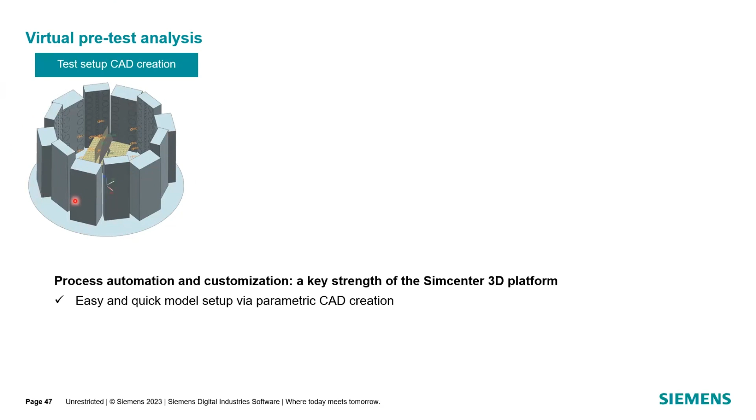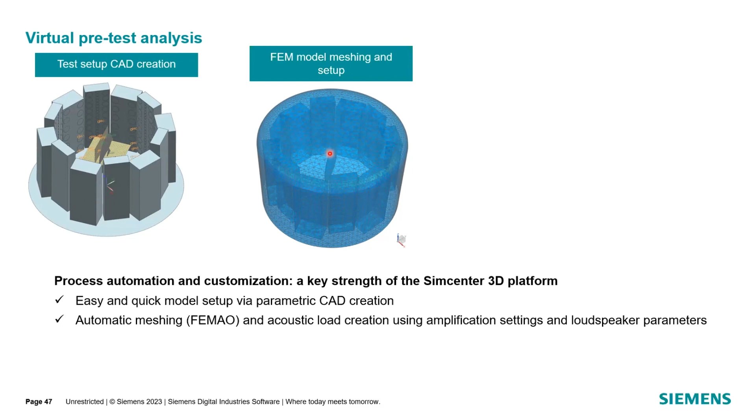We can then automatically mesh this for the acoustics, also taking into account the coupling to the specimen which will be inside. And we can then create one vibroacoustic model, which we can solve with Simcenter Nastran for both the acoustic and structural responses.

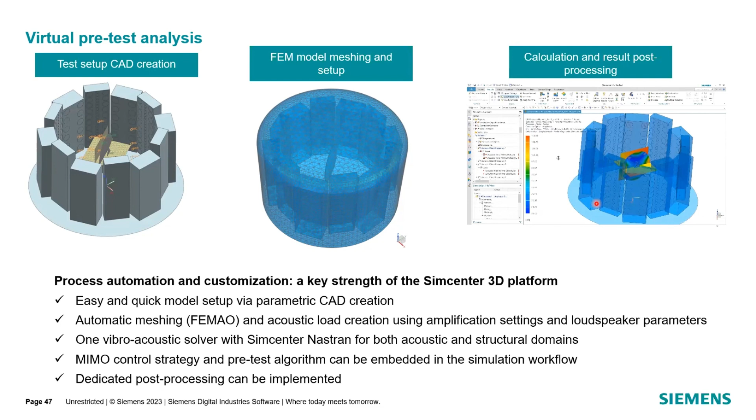It also has the openness to allow you to introduce MIMO control strategies and pre-testing through scripting. We can then have dedicated post-processing, for example looking at acoustic pressure inside the testing volume, or the structural vibrations. We can even build custom dashboards which mimic your testing application, which I will show later on.

One small, let's say, quick validation case I want to discuss with you. We actually made this extensive digital twin of a DFAN testing campaign, which was conducted in 2017 at Thales Alenia Space in Toulouse, with an antenna reflector as test specimen. Here you see the test setup, courtesy of Thales, and just some information on the test.

There were actually 96 speakers used: 6 times 10 three-way cabinets, like the one shown before, and also 6 times 6 subwoofers, which were positioned around the specimen. There were 6 drives, so by column, one for the top, one for the sub.

The inner radius of the testing volume was 2.6 meters. There were 30 microphones, 16 candidates for control. Like I mentioned before, typically you use about 8 control microphones. Here we put 16 at likely locations, such that we could check if we only take 8 out of the 16, how well is the control, etc. So it was also more a research activity.

There were 14 microphones placed in front of the antenna, such that we could monitor what the sound field looks like that's hitting the antenna. And then there were 13 accelerometers placed on the rear face of the antenna. We went up to 10 kilohertz testing.

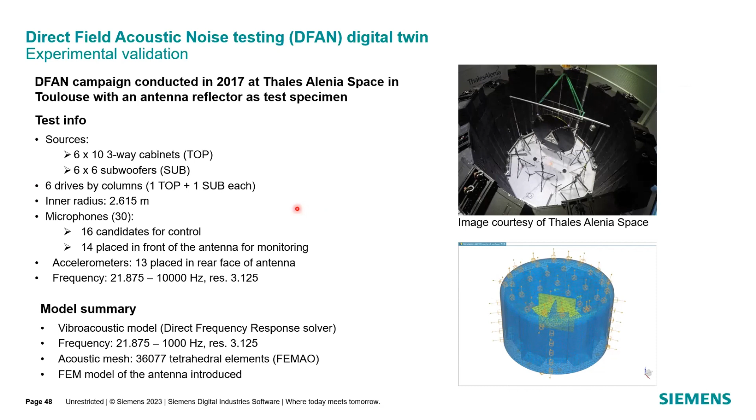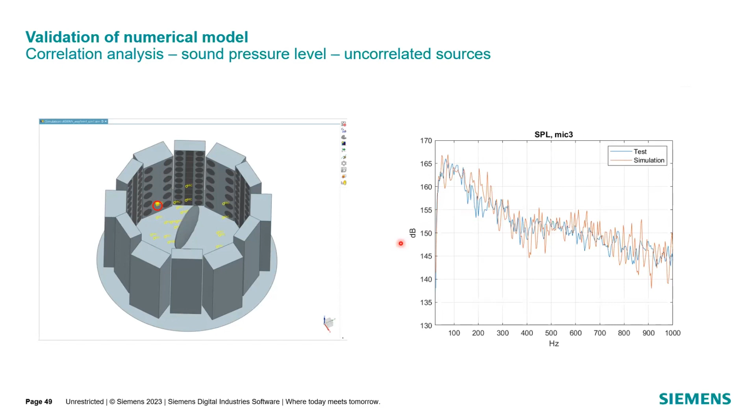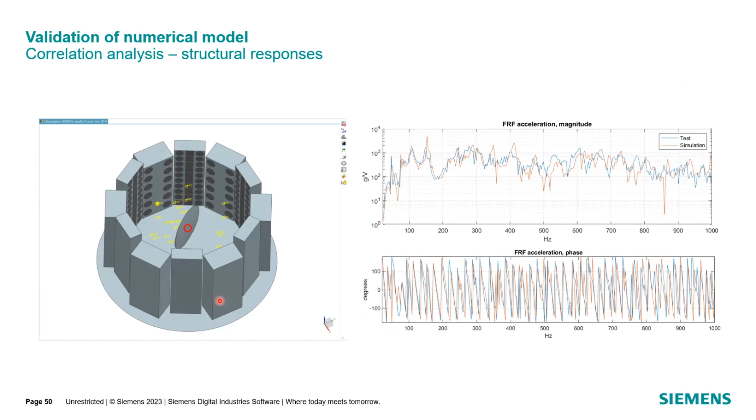At the same time, we also simulated the transfer functions when we drive only one of the input drive signals with a unit voltage, and we look at the acceleration on the antenna. We can see that we capture very well both the vibration levels and also the phase information. We have a very good prediction agreement there.

With those models, we can now actually predict what happens in the test. For that, we can also virtually run this test and do what we call a pre-test. So we basically process the targets, enhance the reference profiles, optimize the performance indicators, check the voltage requirements, and we can then also check which locations are optimal for using as observation sensors.

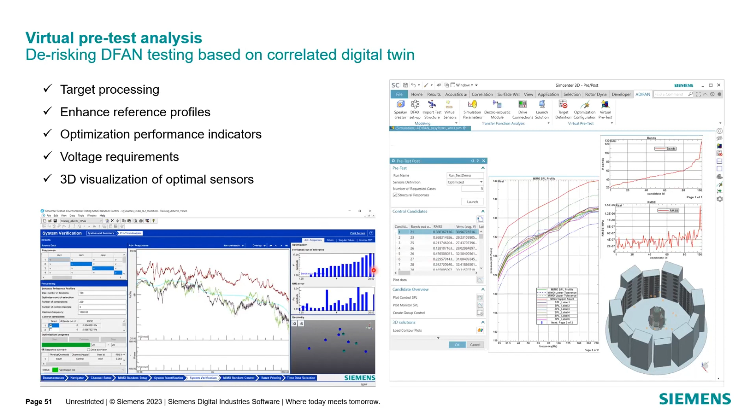Our team, through scripting and the openness of the platform, built this dashboard, which reflects very well the dashboard that we have in our test lab application, such that we can do a similar analysis that would typically take days of pre-testing. We did it basically on a laptop up front.

The result we got was, if we were using the best practice common sense approach to place the control microphones, we would get, for all the observation microphones, all the dashed lines as responses. The green curve was the target we were trying to reach, and the allowed tolerance levels were the dashed blue and dashed green line. The red line should in no way be crossed because that would damage the specimen.

We see here that 94 bands are out of tolerance, even though we're using experience with these kinds of tests to place them. If we do the virtual pretest analysis, we narrow down the uniformity of the field, and we only have 5 bands which are out of tolerance. This shows the strength of using the automation and customization capabilities we have inside Simcenter 3D, together with the high fidelity vibroacoustic simulation technology and science.

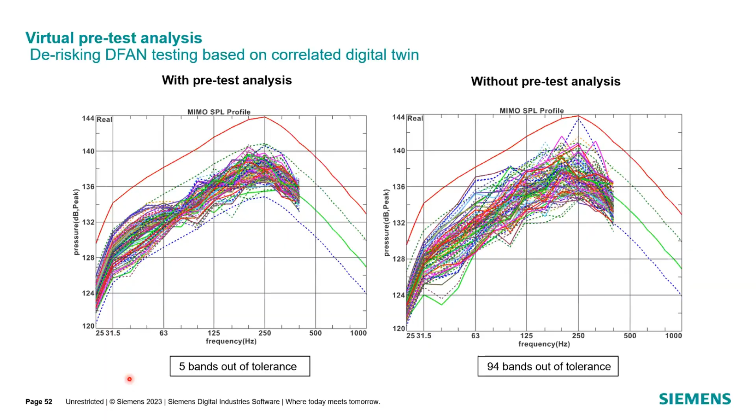This brings me to the end of the third application. I hope this was very interesting for you. We showed you 3 quite different but very relevant applications in the aerospace and space domain, going from drone noise in urban environments, where we considered free field radiation, including experimental validation, and plugging it into an actual city environment. We have the aero engine intake noise, both with experimental validation and the capabilities of liner optimization, and then launcher liftoff noise and DFAN digital twin, where we can de-risk and enrich our testing through high fidelity simulation. I thank you for your attention, and I will pass it on now to Scott for the Q&A session.